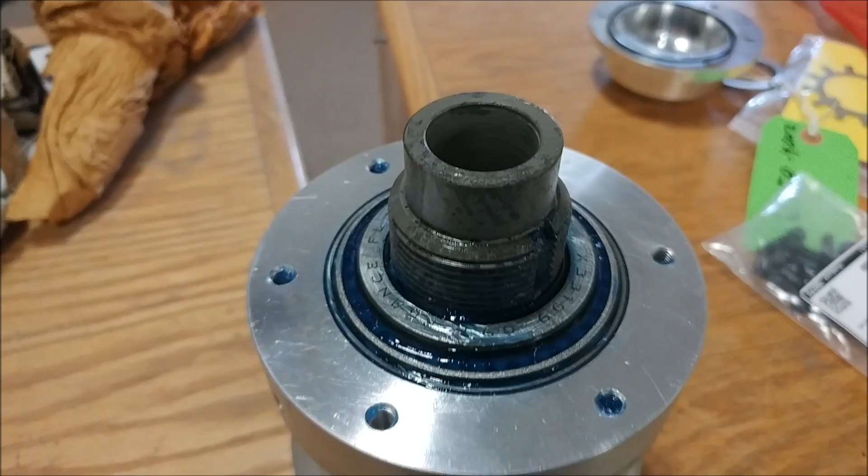Welcome back. So for the second half of this week, it was time to start assembling the lower half of the belt drive reduction unit. So here you can see I've got it together. I've got the bearings in there and packed them with grease. And there you can see I've test fitted the pulleys on there, and those pulleys are all bolted together and

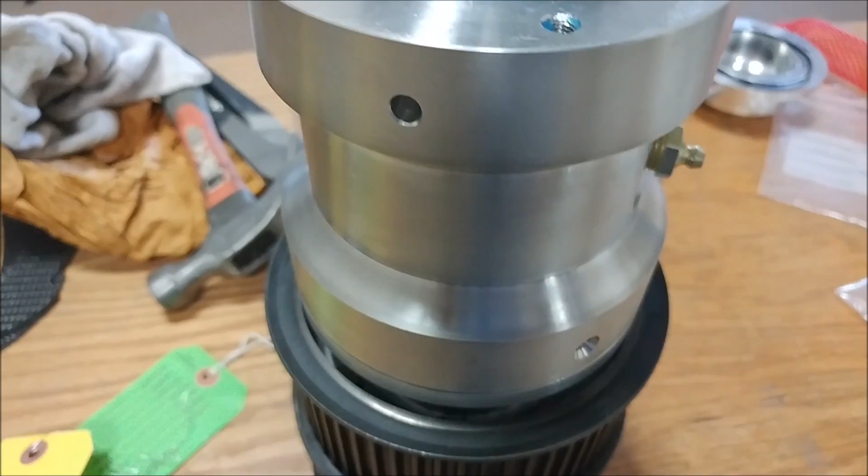being torqued and everything. So here on the top you can see you have the stake washer, which is the one with the sort of fingers sticking out, and then above that the stake nut. And so one of the washer tabs, or actually two of them, one on either side, just gets bent in there, and that stops that from ever coming loose. And we got it pretty snug. We may have to adjust it later.

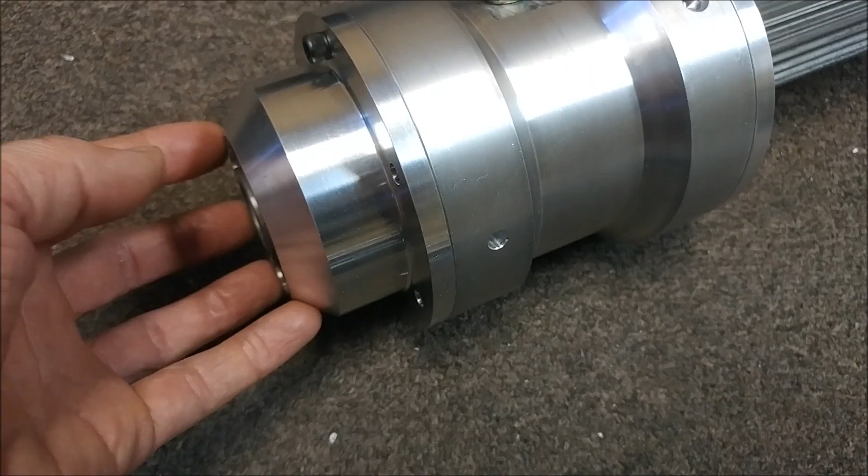Anyway, so there you can see, just put my hand there, you can see how big that unit is. Not that big. And the spline shaft on there, which goes through the pulleys, it also connects up to our LPEX adapter at the back of the engine, but you'll see more of that in a little bit.

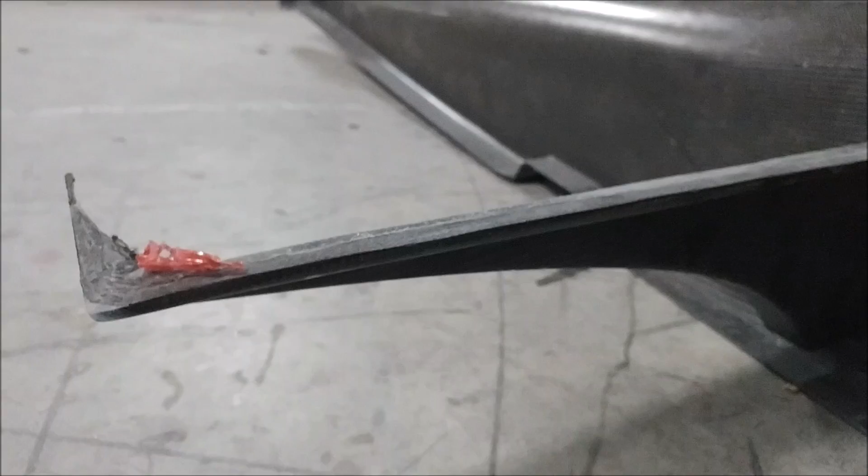And here's the first of the cantilever seat mounts that's been laid up. So as you can see, it sort of fits snugly over the keel there and provides nice clean access underneath the seats without having any seat posts or anything like that. And it's fairly rigid, and we're going to be obviously adding the second one in there and then some bracing between the two of them.

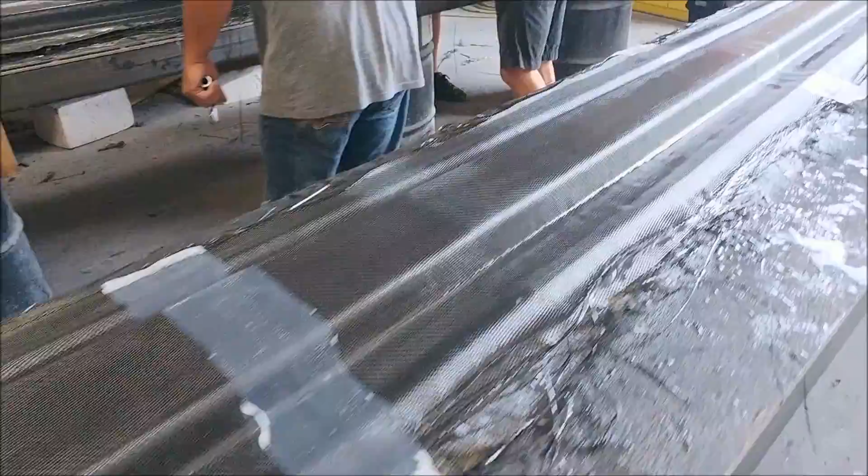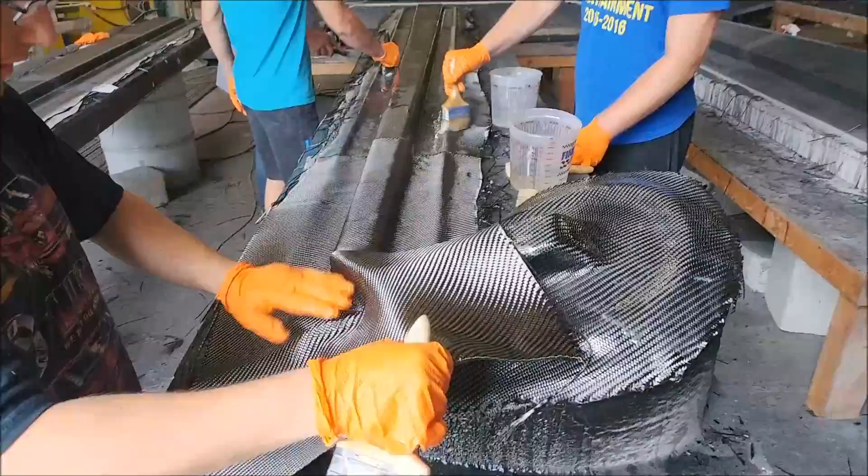And here the guys are in the process of adding the heavy layers to both of these aileron spar molds. So you can see the first one's been finished there, and they're just working on finishing off the second one there. And there's Zach just putting some of the heavy layer down in there, working in, and everybody else is just sort of finishing off their little section.

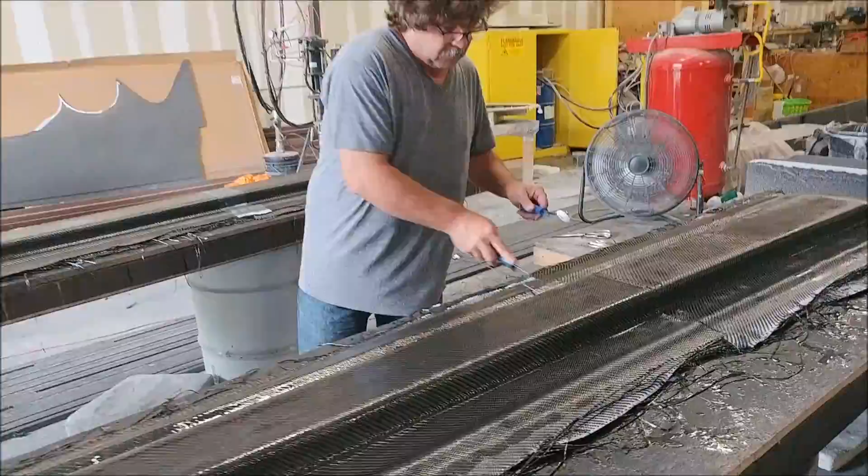And Jeff's got the rollers out there and getting any air bubbles out of there. You don't want to have any bubbles in that whole system at all. So anyway, those are coming along.

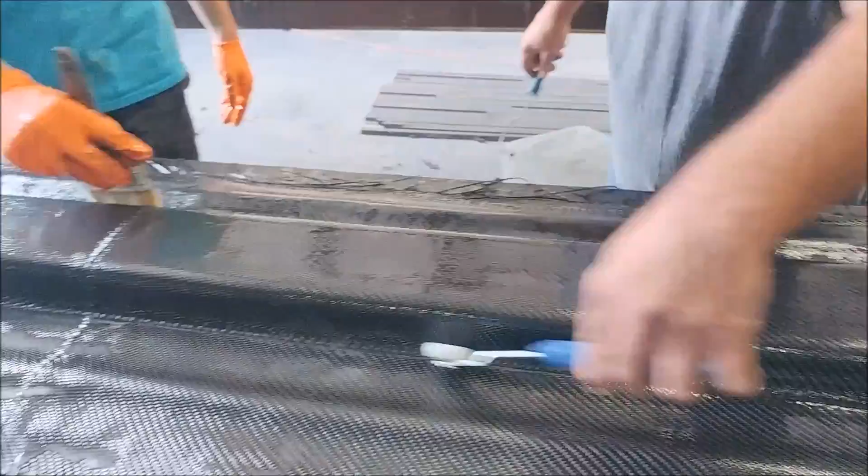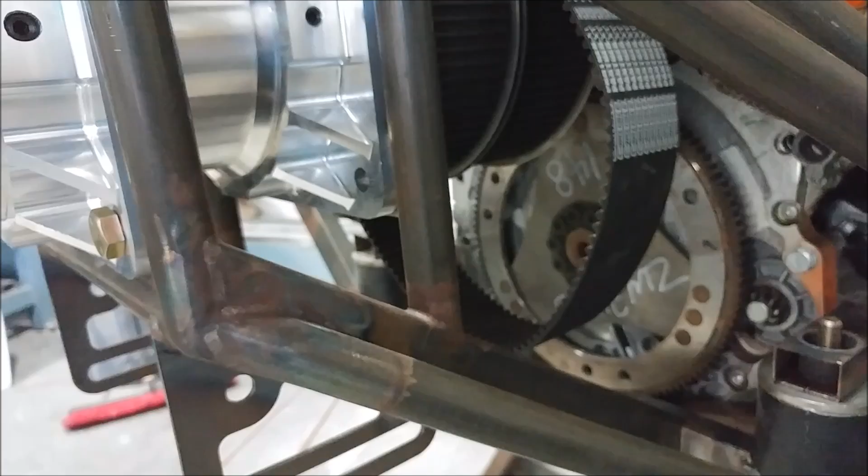And here you can see I have the upper half of the belt drive reduction unit bolted into the engine mount frame, and just one of the belts on there right now. So just waiting to bolt up the lower half to see how it all fits.

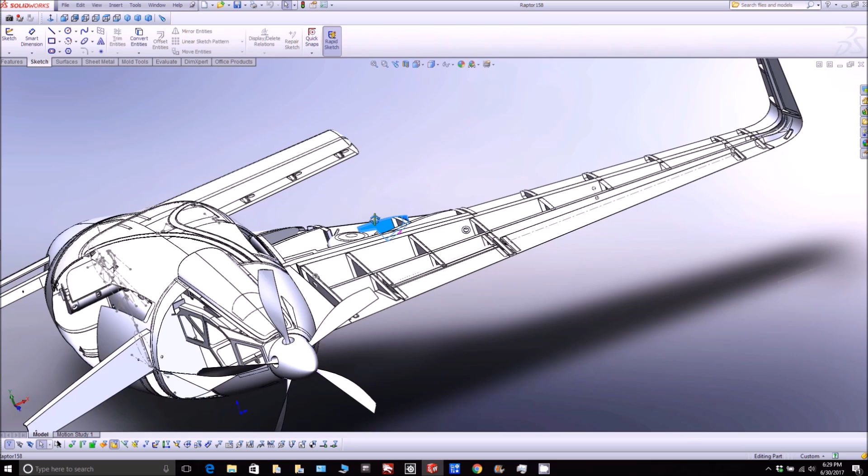So it's time to start getting on to doing all these wing ribs, and so the first thing we wanted to do now was just get these two for the wing strake that need to be redone. So those ones there that I'm highlighting, and those are the ones that we actually started last time in the video that you saw. And then I'm going to start with the real simple ones here. These are all these triangle ones, so there's basically 3 different ones there, so left and right, so there'll be 6 altogether there.

And here you can see I've already cut a bunch of them out there, and the guys are working on just putting sort of a sealer resin on there, so when those things get primed, they don't just absorb all the primer and take tons of coats.

And here's the ones from last time. You see those are in primer now, and getting their second round of sanding. And keep in mind, these are just plugs that we're going to be pulling molds from, so it's not the actual part itself. Somebody might get confused seeing that and thinking, oh, that's the rib and it's pretty heavy because it's MDF, but yeah, that's not what's happening.

There's the other one for the strake tank as well. So those ones are coming along nicely. They need a little bit of sanding and stuff, but it's way quicker than creating the whole platform and foam and spray putty and all that sort of stuff in order to create the plug. So there you can see those ones that the guys were sealing. They've already had their primer on there, and so they're ready for some sanding.

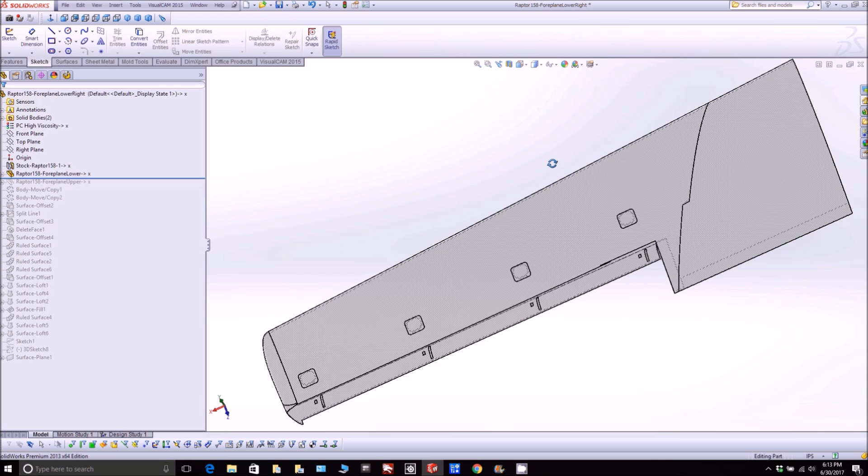And to keep the rest of the big stuff moving along, I decided it was time to start on the skins for the foreplane. So this is the lower skin of the foreplane on the right hand side, and you can see there we've got basically 2 different things going on there. The actual skin itself, and the one we're going to mill, which is going to be oversized because it goes all the way inside the fuselage.

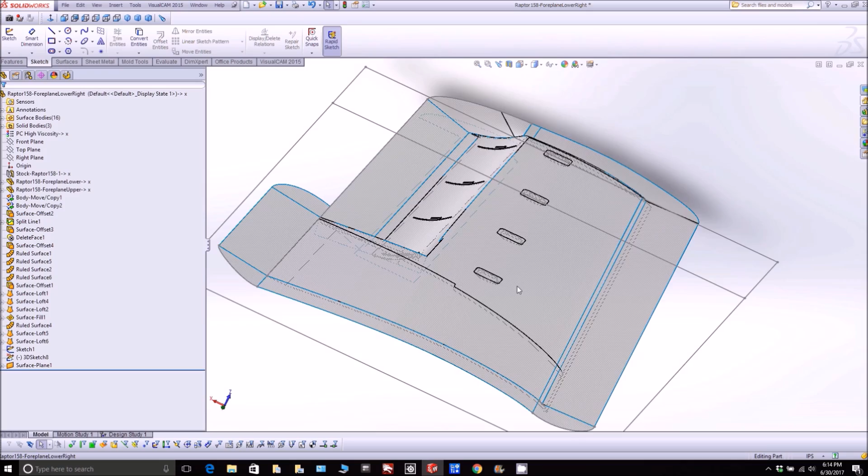And here it is with the flanges put on there. So it's a pretty simple one, nothing complicated, and fairly flat, which is good.

And here's the guys creating the 2 platforms for those. Just screwing down the flooring plywood that we have before gluing the foam on there. So it won't be long, and we'll have those up on the machine and getting milled. So still moving along with the big stuff, even though we're sort of doing ribs as well.

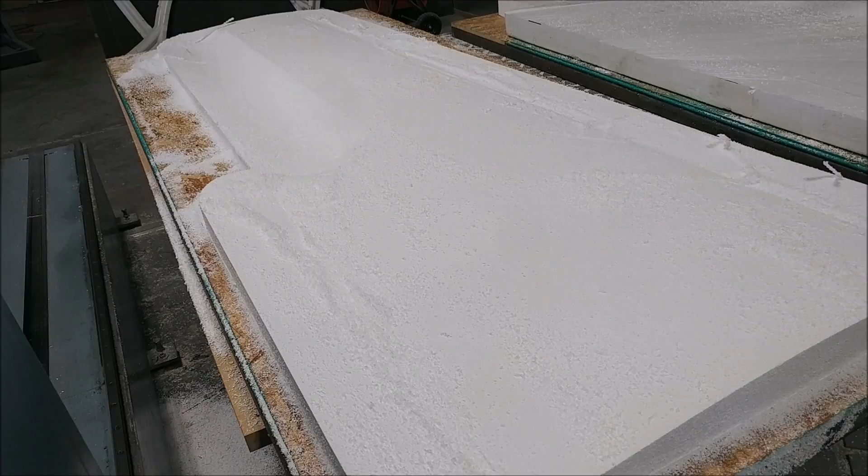And here you can see the first one's already done on the machine and milled, and it's got lots of loose foam, so it's difficult to see what's going on there, but basically it's a pretty simple platform really. And there's the second one already underway, so it won't take long and they'll both be done.

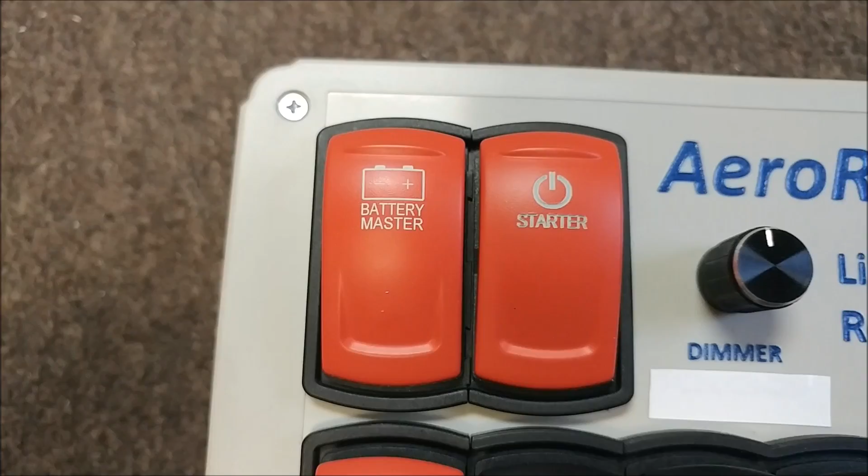And now for something completely different, Stan at AeroRock has sent us this little demo panel he's been working on for us. So he's made these custom switch panels for us. You see it even has little Raptors in there for the icons, which is kind of neat. So we're going to be using these switches in an overhead panel, and there's going to be at least a dozen of them that are different things there.

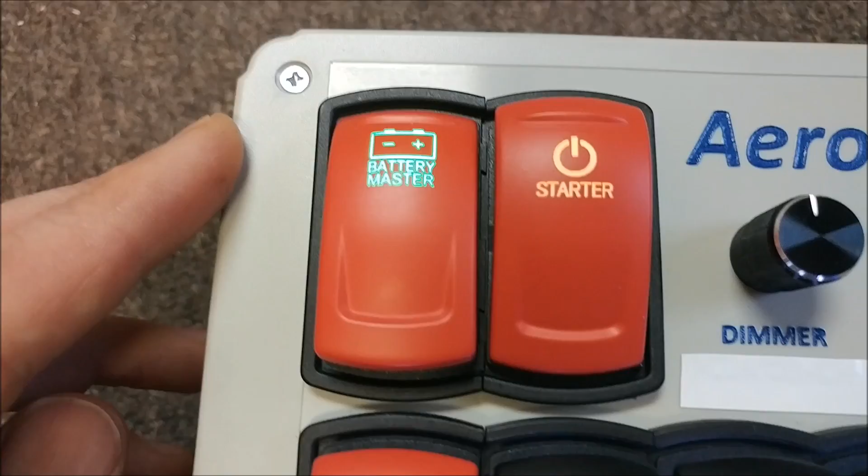So you see he's got this thing working, so you press the battery master there, all the switches kind of light up there, so you can see them in the dark. And of course there's a dimmer there, so you can adjust how bright they are in the off position, which is kind of neat. And they actually have different colors on there. See, the battery is green and then the other ones are white. And see, when you turn it on there, it actually gets brighter, which is kind of neat.

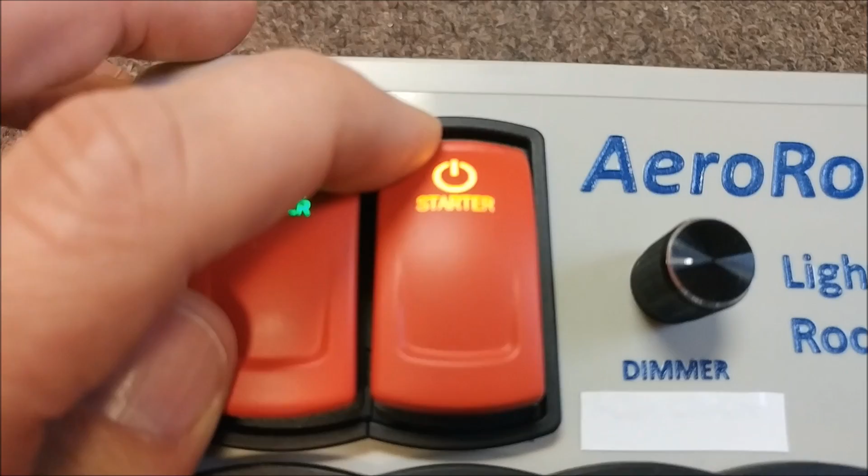And there's one for the strobes and taxi, and you can see the starter. That's the one you just push and it sort of clicks in and out, so it's momentary on. And then avionics master, and then he's got one for door seals there, which is blue, and a pitot heat, which is kind of like a reddy pink color. So we'll be using those, which is kind of neat, and it was nice of him to put that together for us.

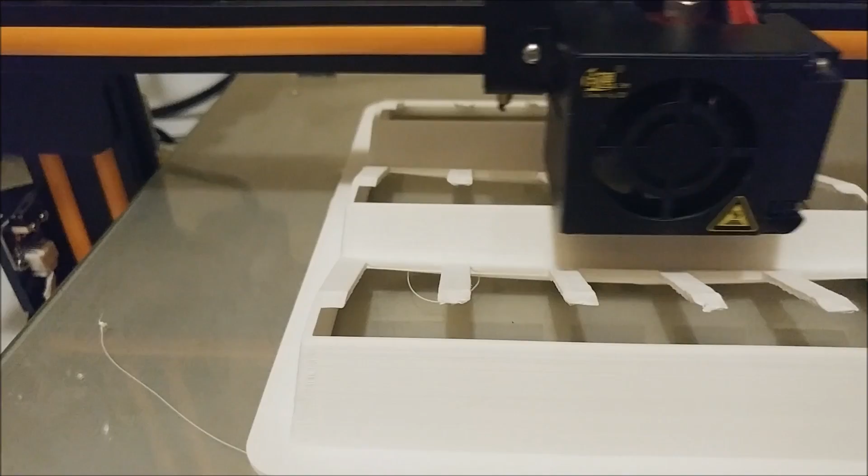So I need to make a panel for that, and just for the prototype I decided to 3D print it, and as you can see it's most of the way done here. And unfortunately on this one, because of the way I did it, just really threw it together quickly, those little bits sticking out there are kind of bouncing along, and ultimately it came out a little bit messy on those transitions there, and you can kind of see that. So I'm actually getting sorted out to do that again.

But there you can see we've got room for 15 switches, and this will be in the overhead console. And we'll give it a quick sanding, we'll prime it and paint it black so it sort of matches the carbon of the overhead console. But yeah, it won't be this one, it'll be the new one that I'm printing up over the weekend.

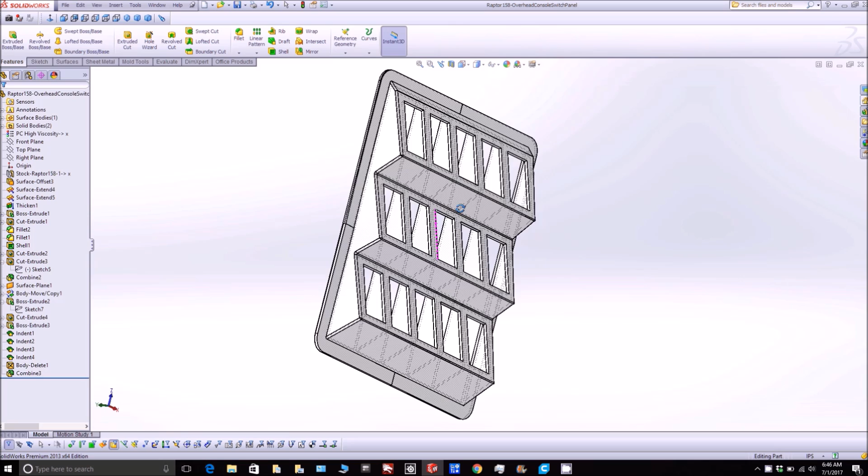And here you can see in SolidWorks, this is basically what I did there, and you can see now I've added these extra panels in there that I'm highlighting, so they're going to bridge and add extra support and stop it from moving around when it's printing those transitions between the switches there. So that one's up on the 3D printer now, and it'll be finished probably by Sunday.

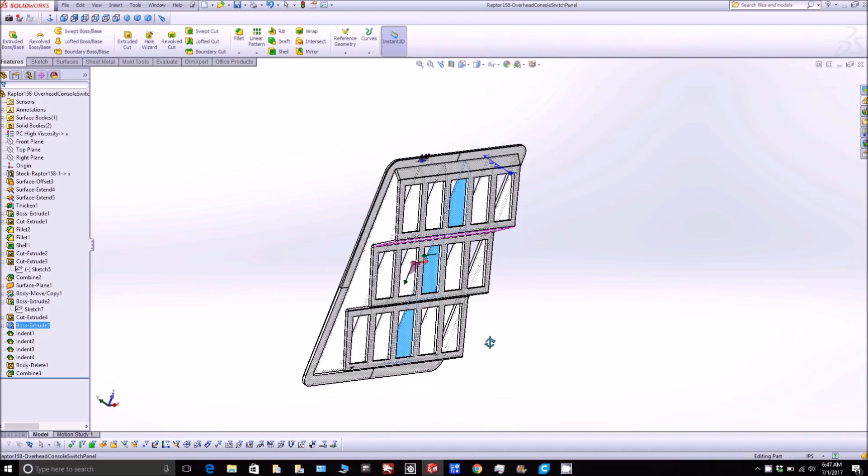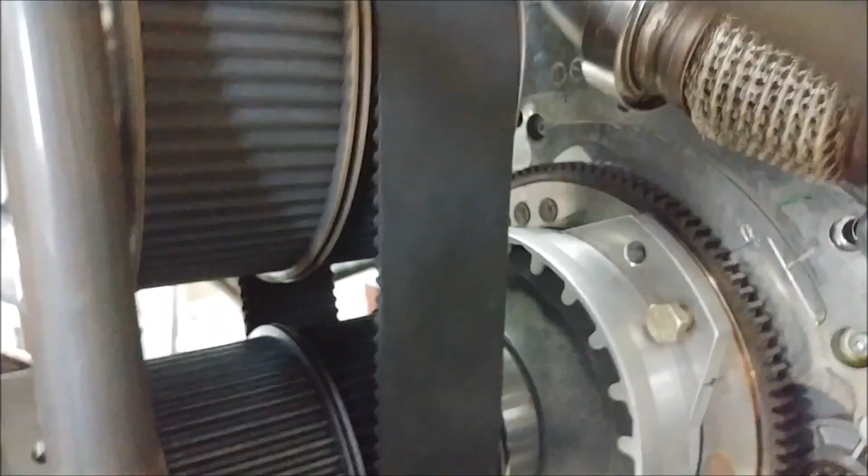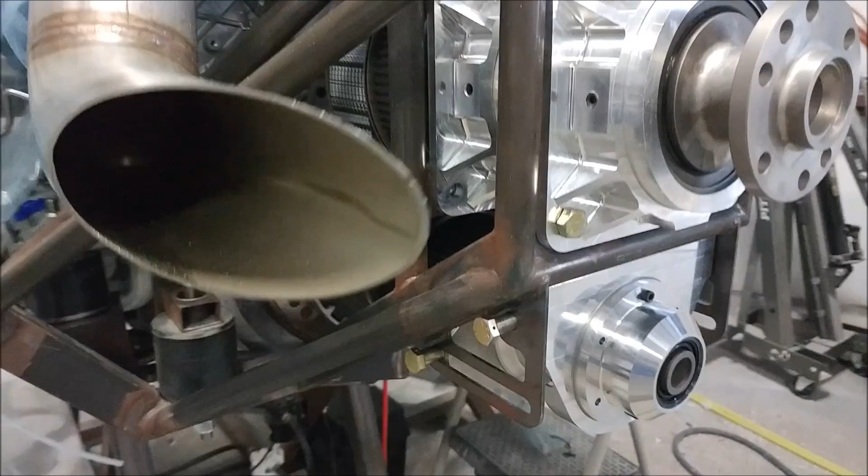That new pulley arrived, and it's been already taken over to the guys across the way there to machine it next week. So it's coming together nicely, and things are fitting together and lining up nicely. I don't even think we're going to have to make any adjustments there. We'll still have the tensioner in there, but the belt already has a pretty nice bit of tension on there, so it's coming together well.